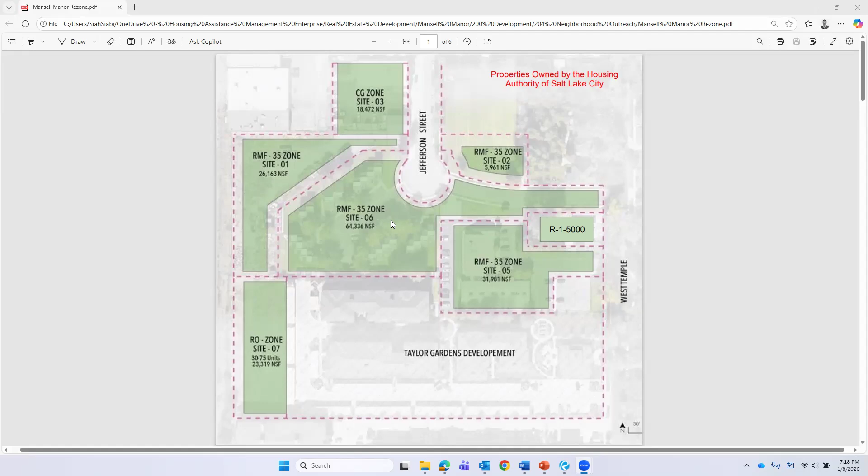So the thought was, when looking at this, how do we create something that's more buildable, that something can actually occur on it? Let me make this full screen. Can you guys still see that? Yeah, it looks great. So the thought was to really break it up into a single zone, as Dan mentioned, one on the west side that could potentially include the Jefferson townhomes. And that's really an exercise in getting one zone across the lot and getting rid of the setbacks so that something can occur on the site.

The other piece to that is then doing not a rezone, but just a lot consolidation, really getting some of those lines cleaned up so that something can occur on this side as well.

Now, Cassie's on here and she's been helping us go through this process. So really the rezone is focused on what you see here as number one, just to kind of even out the site, make sure that there's one zone across it and really make it more buildable. What that means is, if that goes through, we can then begin to think about what might go on that lot. So we're really in that first stage of a lot of steps of seeing what's possible here.

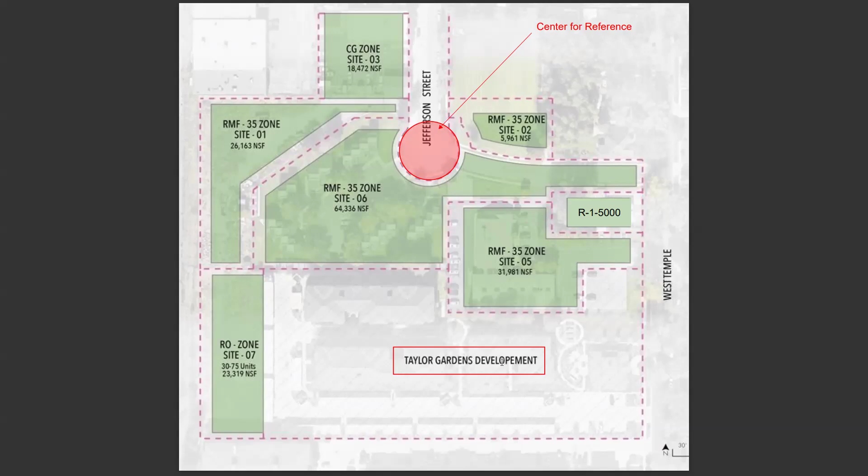I'm going to show you guys this as a point of reference, the roundabout at Jefferson Circle and Taylor Gardens to the south. So part of the planning process is to kind of show, you can see this red circle here, and Taylor Gardens to the south. Part of the planning process is to just show what the massing would be if it were to go through the rezone.

This graphic that maybe has been shared around through the rezoning process isn't at all what's going to go there. It's really just showing that if there is one zone, this is kind of the potential, and that's really used as a conversational piece. So it won't look anything like this. We still would have to hire an architect, put out an RFP, and go through the full procurement process.

And then once that happens, we can start to think about, which ultimately I guess the architect would help with, what's going to happen on this lot or these lots. And then I think we'd come in for feedback at the point that we know something is happening.

Same thing kind of applies for this side where you see the blue. That's not part of the rezone. It's just showing, hey, on this side, this is the height and this is kind of what the zoning allows. And as Dan alluded to, it could be home ownership. It's basically wide open, but without getting these approvals and going through that zoning process and the rezone process, we don't even know what's capable here yet, besides what it can hold as a massing.

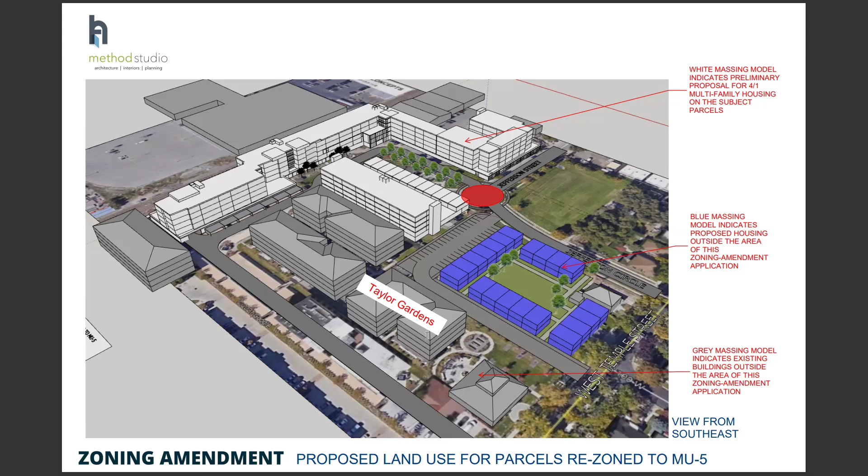So here you can see a different view with that red circle as a reference at Taylor Gardens. This is just flipping it around. I think a lot of this maybe was a little bit of confusion, that maybe this is a proposal, but it really is just showing, basically with setbacks and heights, what can be allowed.

If this goes through the rezone, then I think the next step would be putting out that RFP for the rezone portion on the west side and starting to really say, okay, something can happen here.

As you guys might know, in development, even to get to the point of thinking about what can go here, there's probably - Dan, correct me if I'm wrong - like 100 steps we have to do: looking at financing, looking at all different aspects before we're certain that something can go here. And at this point, I guess we're at the first baby step, which is, can we get this rezoned so that we can actually get something built here that makes sense?

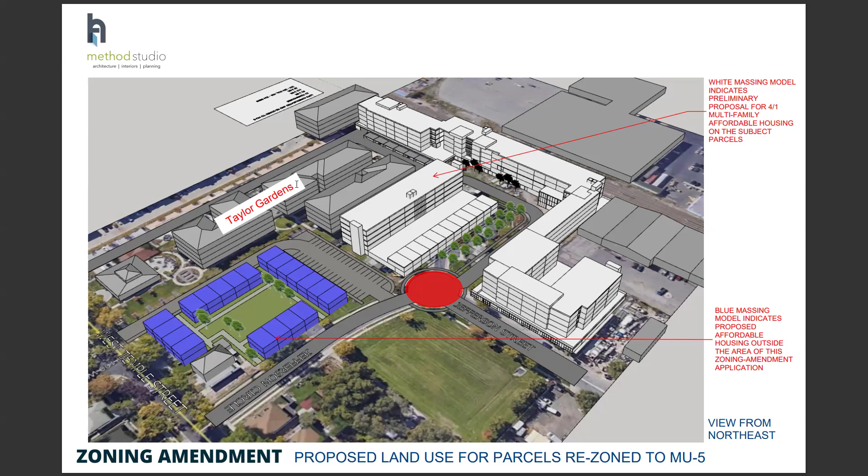Could you go back to that original site plan? Yes, I wanted to - it's very light under here. This is Taylor Gardens, just to put it in scale. Again, a wonderful place where many seniors live. Unless you live in building D. Oh, yeah.

And then this is our office that we're tearing down. We're leasing it out in the interim to a school for sort of a daycare school. This needs daycare, that's for sure.

So right now, those are 22 bedroom townhomes - are they at 50% AMI or 30% AMI? They would be some up to 80% AMI. No, I mean currently, what are they? Yeah, some of them go up to 80% AMI. Really? Yeah, I tried to look up this information and found really different things - some of it said it's deeply affordable, 30%.

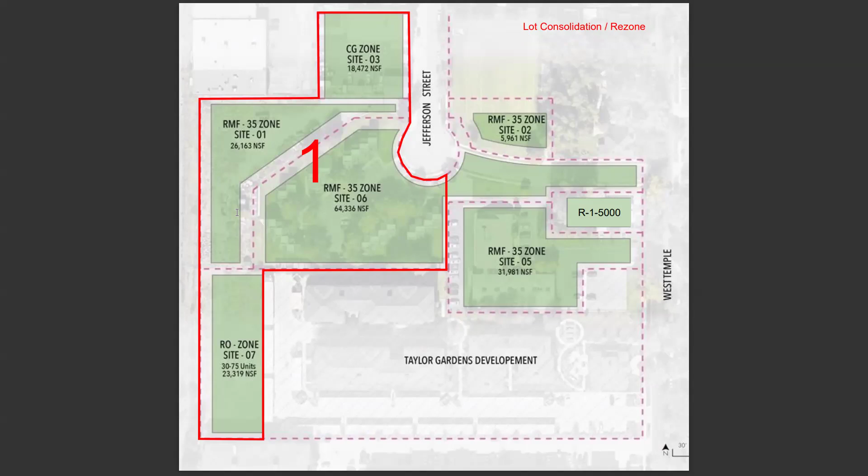And we do own that red house, as you know, and that would change too. That would no longer just be a single family home. But all of that - we're in the very, very early stages, and I'll commit again to plan with the neighborhood council on what we do on all these.

Yes sir - recognizing, of course, you have to design it, and that was just showing what could be.

You did mention that you were considering retail. So the way that it was designed there, Taylor Gardens or whatever it's called, was quite open. Would that be the intention then, to kind of open up?

Well, I think the only way we might try to sneak some retail on the ground floor is on 1700. So it's still kind of a very close property then. Yeah. Do you own property on 1700 South at this time? Well, we're trying to assemble that one parcel above the CG zone site. We've been trying for a couple of years, actually. But if we do, we think it's appropriate for maybe - it doesn't necessarily have to be drive-up big-time retail, but some kind of ground floor activation. Again, we're a long ways from designing that, but I'd like to keep that as a concept.

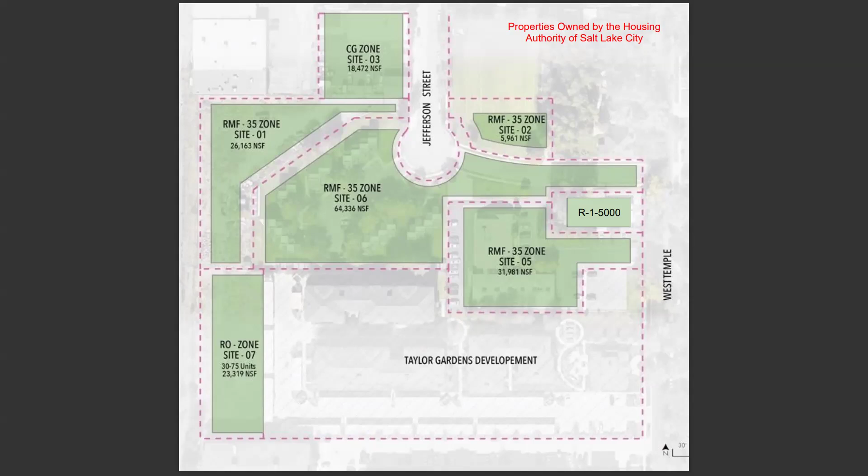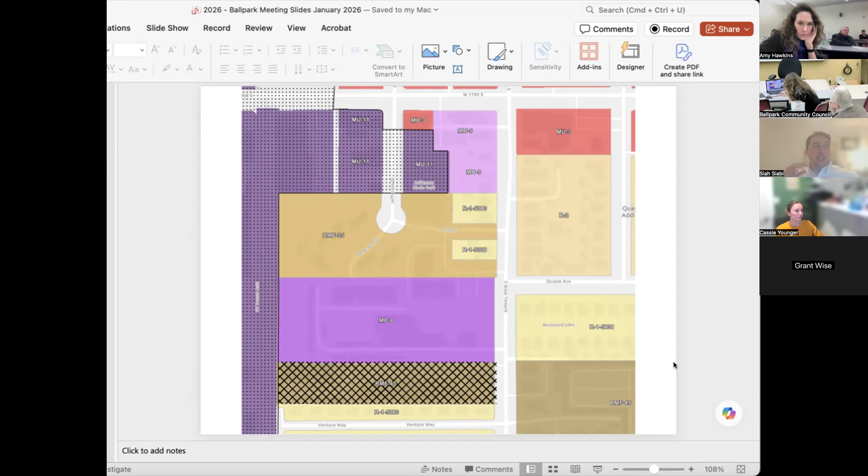As Siah said, we're trying to not necessarily maximize it, it's a kind of weird conglomeration, and just to be clear, we're not asking for additional height. I know typically in a rezone, people come and they want more height, more units. The rezone is really aimed at creating one zone so that we can have a buildable site that really is in 2 of the zones lower than what's allowed. So we're not trying to add more than what's allowed, it's actually net less. It's more about creating uniformity because as you can see in this graphic Amy pulled up, it's really a hodgepodge of zoning and different overlays, and to get anything done here, we really have to uniformly make that into one site, which Amy can show you here.

This is MU11, which I believe allows 11 stories. Yeah, and we're trying to max it at 5. So we're actually almost at half or over half. We're asking just for a singular zone so that something can happen. We're not really interested in adding a ton of density that's out of scale with the neighborhood.

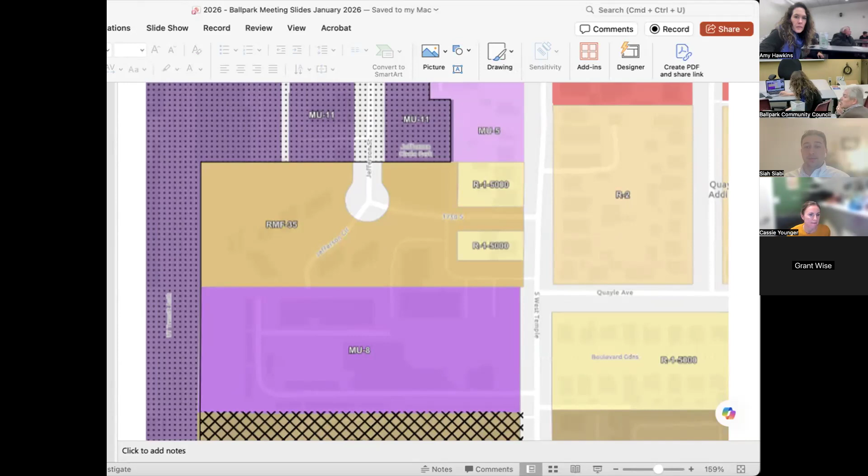Maybe daycare, something that's an interim between retail and service. Our developers don't want to do that, they can sell every unit they can, they have to squeeze everything out of the property, but you guys have, I assume, more flexibility.

That's what we're looking at for the rezone. The MU-11 is really only a tiny piece of the property, the majority of it is RMF-35, and there's an MU-8 portion down there. That's the part that Dan's really sold us on about being attractive as townhomes.

I don't want to miss Fraser Nelson's question about your working definition of workforce housing. It's an overused term. What it really means, generally, is people that are employed, generally people that businesses want to attract as employees, and therefore need a place to live. Kind of like described earlier, it's harder and harder to live in certain neighborhoods, including this one, because of the high cost of rents and ownership. So, 80% of AMI, sometimes people say 100% or 120% of AMI.

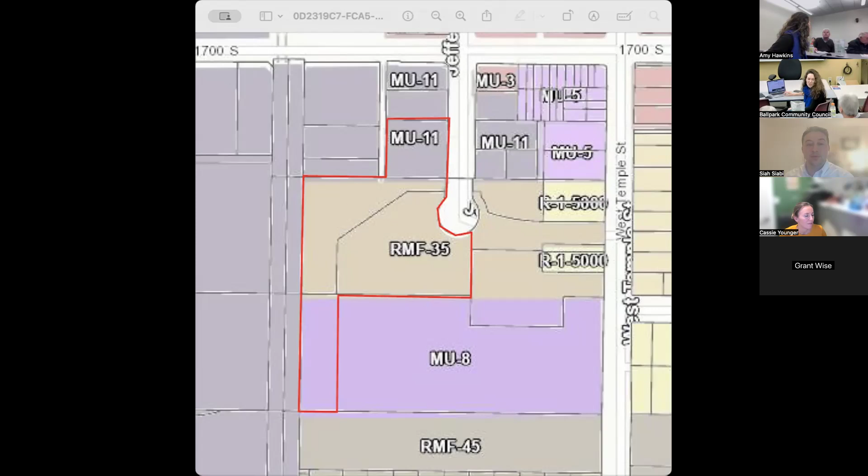Amy, what is this map of? This is the current zoning. So the MU changes are very recent, those are like mixed-use. RMF is a hodgepodge.

All right, thanks for signing on, friends. Thank you so much. Thanks guys, my sister and I used to live in those.